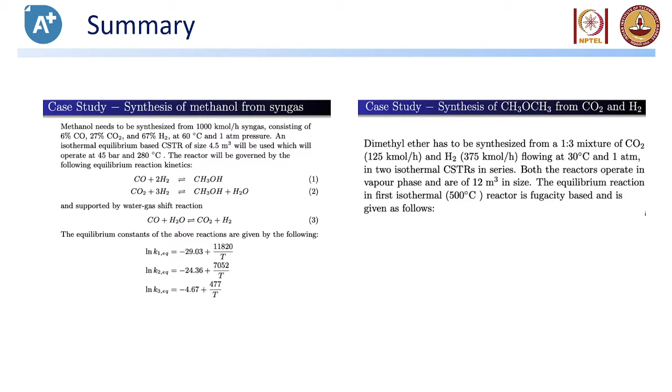So post that, I have only a couple of questions. Okay, so can you just answer quickly which among these are the model palettes available in Aspen among the four given? So among these four, there are a couple of model palettes which are mainly for reaction systems. Okay, can you just answer?

Okay, let me show you Aspen. So if you go to Aspen, you can just see the reactors under model palettes. If you go to reactors, you'll be able to see 7 kinds of reactors, right? So 2 are based on stoichiometry, 2 are based on equilibrium-based calculations, and 3 based on kinetic calculations. So among the options given, you have this one based on stoichiometry, another based on equilibrium. So these two, the reactor based on stoichiometry and the one based on equilibrium, are the right answer for this. Okay, that was just a simple question.

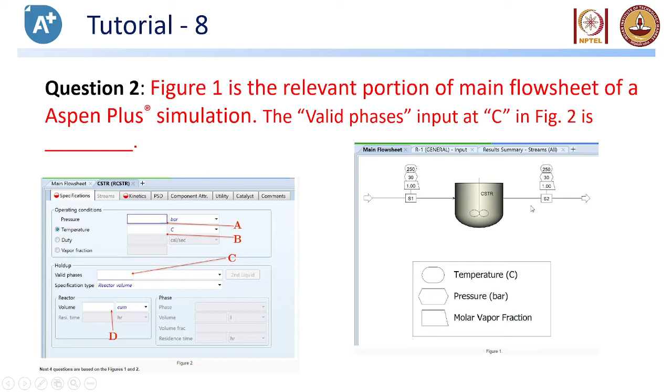So do we need any additional information for answering this question? Does anyone think that we need additional information to answer this question? No. Okay. Anyone else? It's not required, right? You can see that the inlet vapor fraction is 1 and the outlet vapor fraction is also 1. So which means that the entire reaction is happening in gaseous phase, right? So for the valid phases, if we select vapor, that is sufficient. Okay.

Okay, fine. So we were solving this question, right? We said we'll be simulating a separation plant, a part of it, and we just started with this heat exchanger setup in the last class. So people who have Aspen with you now, just do things parallel to me. I'll be showing you step after step. It will be ideal if you have done it previously, as we discussed last week, and come back with the problems you are facing, but we'll do it parallelly.

Okay, so we said that we're gonna simulate the liquefaction cycle of the process in the air separation plant, right? We said we're gonna simulate only the cold box which is enclosed in this red frame. So after finishing this exercise, we'll be understanding the calculator block as well as the optimization tool available in Aspen. Okay, fine.

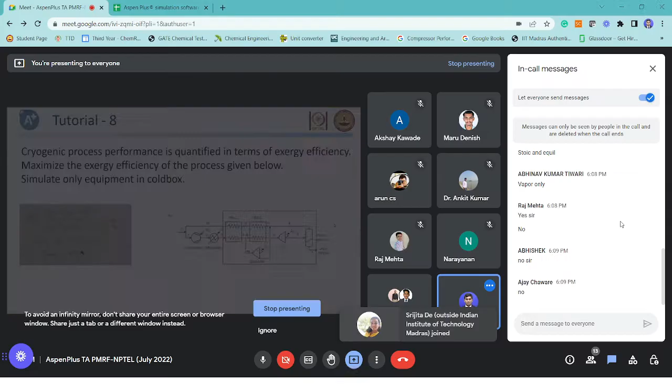So shall I continue with that question, or do you have any questions before we go ahead? I'll just repeat. Shall we continue where we left last week, or do you have any questions before we proceed? Which error you are talking of, Akshay? Assignment 8 part B. Okay, I'll check it. I didn't see your assignment. Towards the end of the session, I'll check it. Okay.

Which error did you get in CSTR, Akshay? Which question you're talking about? Because we didn't do any CSTR exercise in these sessions, so I don't know which question you're talking about. Okay, dependent error in CSTR. Okay, I'll have to check it, because I don't remember what he taught in lecture 24, synthesis of methanol. I'll check it and come back next week, because I didn't see this lecture. If it is coming for everyone, then probably something should be noted. Any other questions? Assignment 8 and the CSTR issue, right? Only. Okay, fine. So we'll continue where we left.

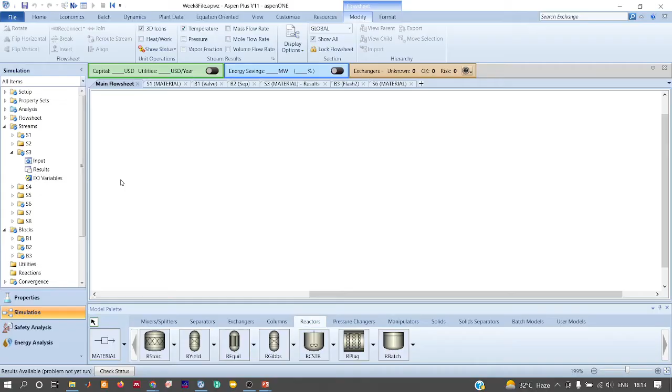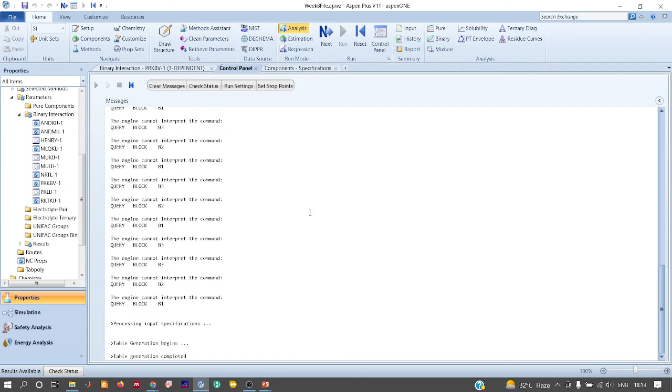We said we're gonna simulate, we're gonna put up this setup. So let me take a fresh Aspen. So the first step in Aspen, what do we do? We give the components, right? We'll start with nitrogen, air. Let me add oxygen as well. Okay. So for simplicity, let us assume air is a mixture of just nitrogen and oxygen. Okay. Then we'll go to the simulation.

So people, whoever have access to Aspen... last date for submission is tomorrow. Okay, I'll inform the concerned person regarding this. If everyone is getting an error, then something can be done with your assignment submission, so don't worry about it. So in your assignment you have a CSTR thing where you're facing an error? Is that the concern you have? If so, your assignment problem has a CSTR related question. Is that what you mean, or in lecture 24 there is some error, right? That's what I understood from your previous point. See, you can unmute and then just talk. Probably this chat is taking me to a wrong conclusion.

Oh, okay, fine, this makes sense. So you have two issues. One, there's an error in the lecture video, and the second issue is the assignment, there is something missing. However, the submission date is tomorrow. I got your point. If there is some data really missing, it will be updated, and the assignment submission date can also be changed accordingly. I'll take this point to the concerned person. I'll take care of it. No, I didn't see the question, so I can't tell at this point if data is actually missing or not. I'll have to check it. Right. So as of now, shall we continue with what we are doing? With respect to the assignment, don't worry about it, it will be taken care of.

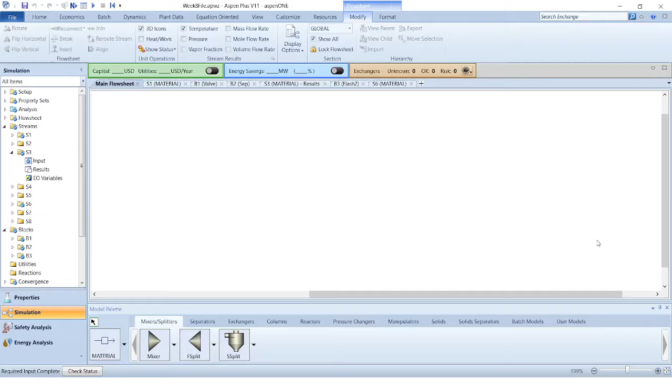So first let us place all these unit operations that we have over here. Okay, so we said one heat exchanger, second heat exchanger, then we said we have one splitter, right? Then expander. People whoever have Aspen with you, please do it parallelly with me, okay? So that if you are getting stuck somewhere, you will know.

In last semester classes, what I did was I was waiting till the students respond and they finish the assignment and then give me a response. However, during that time, all of them were having Aspen during this live session, so it was possible to do so. But now it seems most of you don't have Aspen.

While doing the same simulation, professor. Okay, fine. I will do this simulation first, immediately after this class. Okay, then I'll respond accordingly. Okay, just after the class I will do this, and I'll have to see what is there in lecture 24. I can't remember each and every lecture, right? So immediately after this class, I'll go back and see what is there.

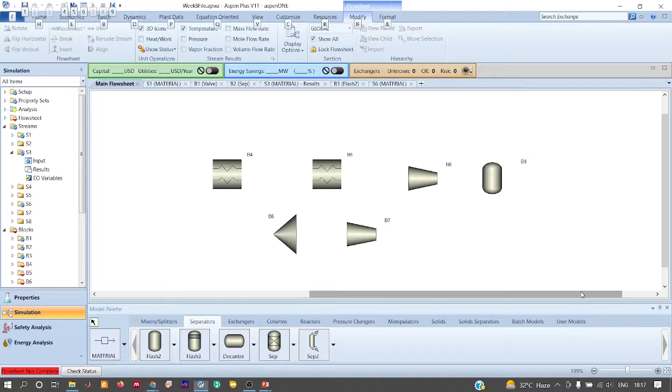Okay, fine. So we'll continue here. So we said we are placing this one, right? So we have the first stream, which is hot inlet, right? Hot inlet is taken to the splitter. From the splitter, a part is taken to the second heat exchanger, right? Then the hot outlet is taken to this turbine. I think I missed something. There is something called a mixer over here, right, which I missed. So let me add mixer as well.

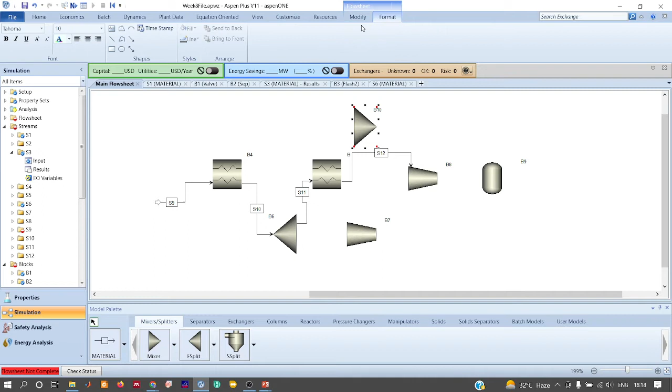Right. So from the turbine outlet, I have one tube. This is my liquid product. This is going to this part. I have cold inlet here. I have cold outlet. See, if I do everything, then it's hard to learn for you. Unless you do it with your hand, it's really difficult to understand. So, try doing it parallelly.

So, I remember few of you said you have Aspen with you, right? Can you start doing it and tell me your status? I'll just put this flow sheet first, then I'll wait for some time for your response, okay? Okay, let me just give the same numberings. Here's my 3, 4, splitter, 4 expander, 9 over here.

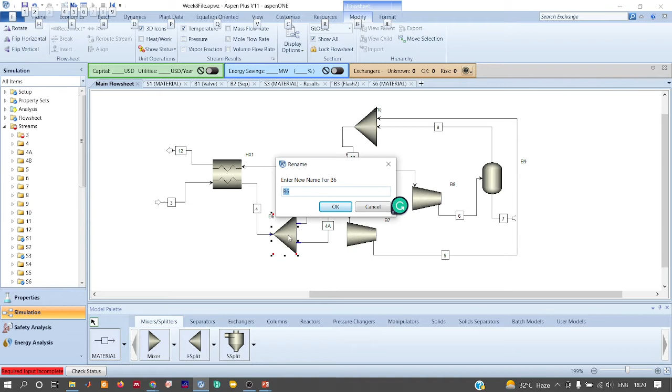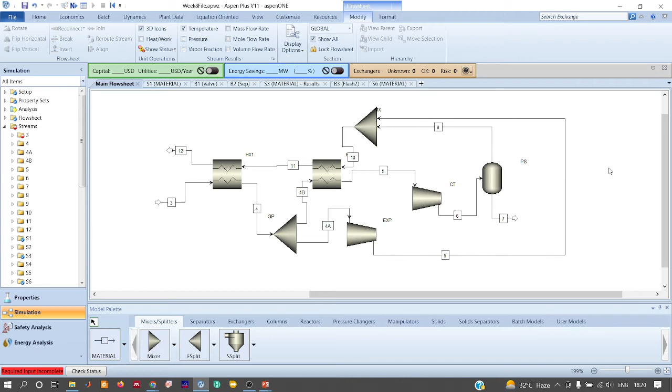So yeah, this is how the flow sheet looks once after setting it up. So people whoever have Aspen, can you also do the same exercise and give me a confirmation that you are able to set up this flow sheet? So all I need to do is have 2 heat exchangers, 1 splitter, 2 expanders and a phase separator, right? So let me show you the flow sheet. So this is what we have set up.

Could you follow what I did? Everyone? Any response? Yes, okay, thanks, Mr. Arun. Others? Can you reproduce the same? Will you be able to do this flow sheeting? Okay, thanks, Raj. Others? Others, can you reproduce this? Will you be able to do that? If not now, sometime later. Okay, thanks, Akshay.

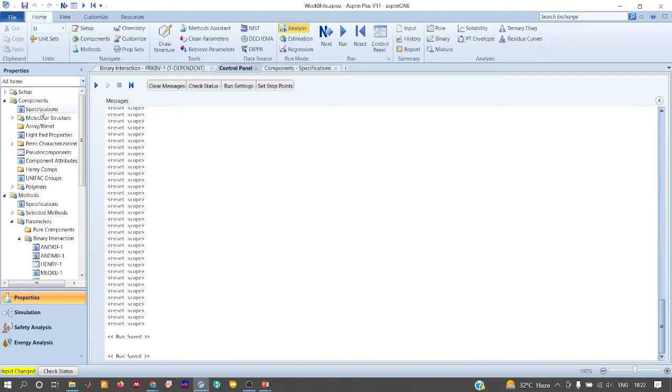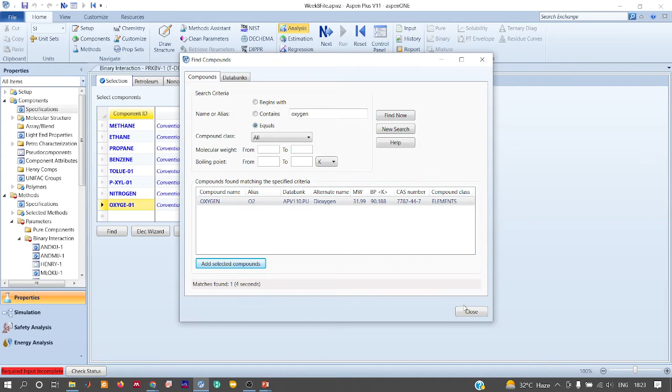Can you show component? Which component, sir? The component means the initial thing. Adding components, is that what you mean? See, what we need to do is, while searching, for example, I'll just delete this, okay? So what we need to do is click on find, okay? We'll search over here. So after searching, it gives us what it matches to. Just click on it, that's all. See, the oxygen gets added to this components list, okay? So that's how we add it.

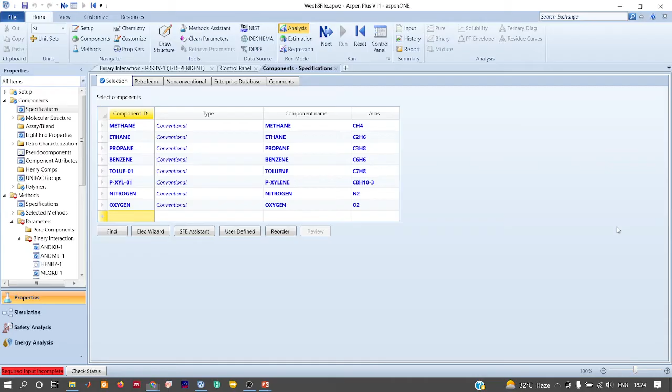Or else there's another way of doing it. Let me show you. Let me delete this. You can just type it over here itself. That's a simpler way of doing it, okay? Could you follow it? Is that what you asked? You asked me to show the components, right? Okay, fine. So just click on next. What it does is, every mixture or components which we give, it handles using binary interaction parameters, right? So we need to give a confirmation of binary interaction parameters. So this will take us automatically to this page. That's what it means.

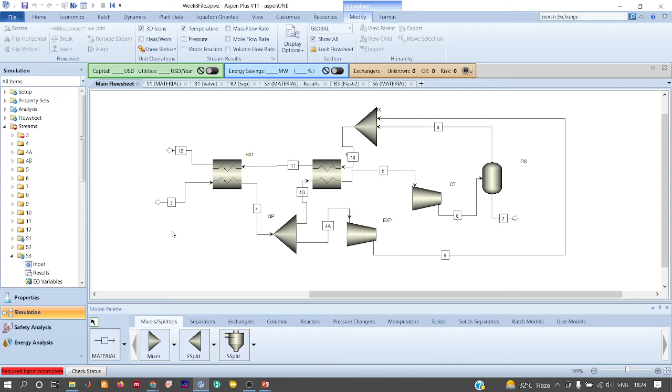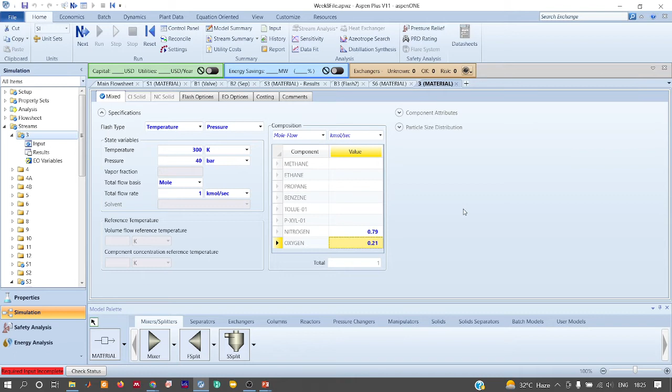So then we went to simulation module, and then we set up this flow sheet, okay? The next task for us is to give the stream data, stream information. For example, stream 3. This is at ambient, let's assume 300 Kelvin and 40 bar, 1 kilomole per second. Now we are talking of liquefaction of air and separation of air into its components. So initially, to simplify the analysis, we'll assume air to be a binary mixture of nitrogen and oxygen, 79% and 21%, just for simplicity's sake.

So after giving the stream input information, you can see that the stream data is complete. So that's why it turned from red color to blue color, okay? Now let's go to block.

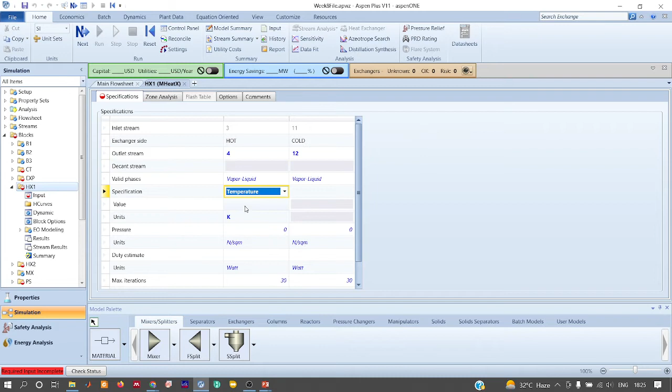HX1. So since the aim is to optimize the operating conditions, initially we'll start with just close enough numbers, okay? Let me just cool it down to 250 Kelvin. I'm just guessing it, I don't know the actual value. This is one of our variables in optimization, okay? The temperature to which it has to be cooled before expanding in the turbine. So that's one of our optimization variables.

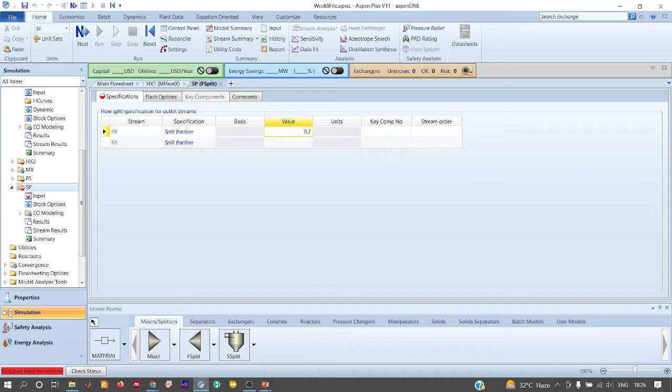Even our split fraction is also an optimization variable. As you see in these slides, we have three variables, T4, T5 and the split fraction. So initially I'll get started with some value. Let me send 0.2 to the heat exchanger, and then in the second heat exchanger I'll give hot outlet, cold outlet. Hot outlet, let me give 100 Kelvin. I'll also give the zonal profile. Okay.

Then I have an expander. This is a turbine, right? So convergence, I'll say this is two-phase, because there's a chance that we have two-phase at the outlet, and discharge pressure, we are expanding it to 1 bar. And let's assume the efficiency to be 85%.

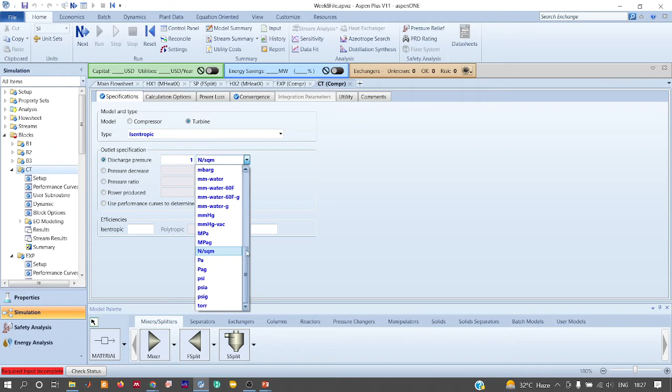Then we have another turbine towards the end. Change the convergence to two-phase instead of single phase. Discharge pressure of 1 bar. It's bar, right? Just be careful. This is about 70%. Then we have the separator. Its heat duty is 0 and pressure drop is 0. Now after giving all this data, it says the required input is complete. Do you see this? Could everyone follow till here?

Giving the input, the flow sheet may not converge at this point of time, because we are yet to optimize the process, right? Optimize the operating conditions and all. The flow sheet may not converge. We'll vary them in the optimization. Okay.

Thanks, Arun. Others, could you follow till here what I did? Okay, thanks, Raj. Others?

Okay, fine. So the next step in this process is to create a calculator block. So how do we create a calculator block? The calculator block is essentially done to calculate this efficiency that we are talking about. So go to flowsheeting options, calculator. Here you will be able to see the calculator block, right? Just click on it.

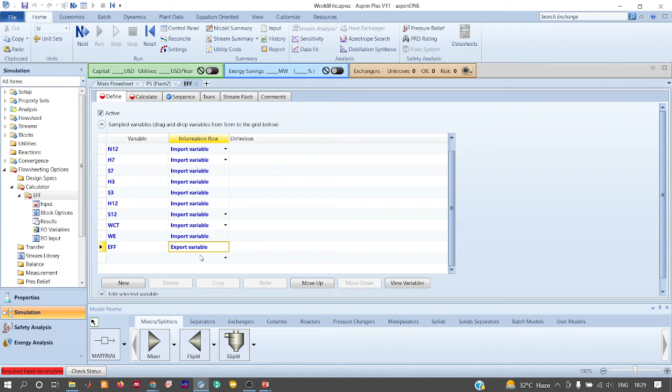So you can see the list of definitions we are about to make. N12 is an import variable, right? All the variables which the calculator needs to import from some other subroutine are called import variables. This calculator block takes all these variables from other subroutines and exports the efficiency that we defined here. Thus, the efficiency becomes the export variable. Let us define each one. Since this is exergy efficiency, this will be output and parameter 1.

This is a block variable, right? Work of the expander. Which one? EXP, and the variable is the net work, right? And similarly, the cryo turbine. It's also a block variable. It's CT block, net, right? Then we have stream 12. This is a stream variable. Select the stream variable, and then it's 12. This is entropy, right?

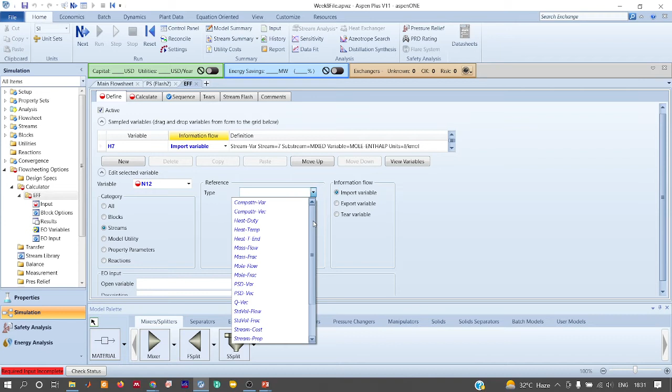Then we have H12, the stream variable, enthalpy. There is a stream variable. Which stream are we talking about? Third stream. This is entropy. H7 is enthalpy of the seventh stream, right? Select the stream and then enthalpy. So this is flow rate. Similarly, N7.

So you can see that the definitions are complete. Now what do we calculate? We calculate the efficiency. Before calculating the efficiency, we need to define ambient temperature as 300. Then we have the definition of exergy, EX7, written here: EXi equals Hi minus Tamb into Si. So H7 minus Tamb into S7. Then EX3 is H3 minus Tamb into S3. Then EX12, which is H12 minus Tamb into S12.

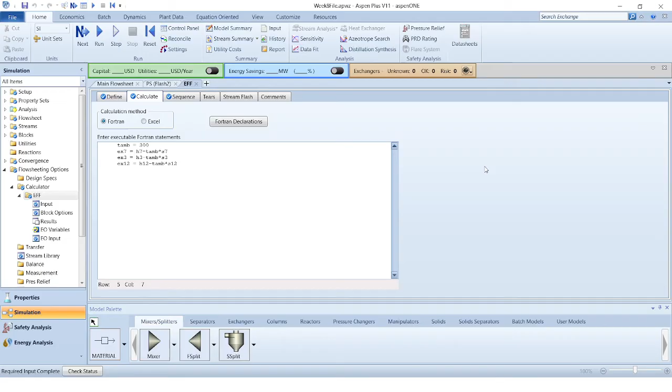So on the numerator side, we have N7 into EX7 minus EX3. On the denominator side, we have N12 into EX3 minus EX12. Just to be careful with the sign convention, I will say ABS. Okay.

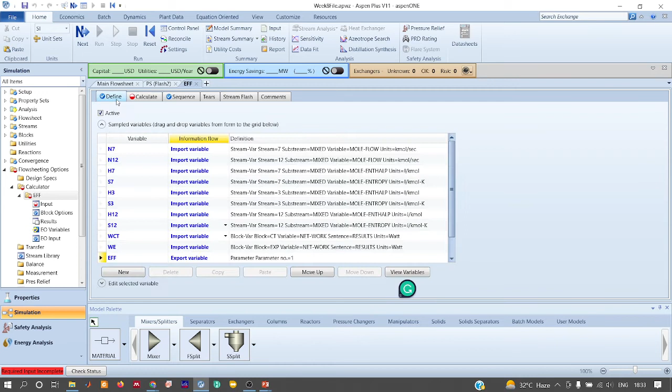What did I define for expander? WE, right? What is my EFF? So that's all. So is the calculator block okay? The property method is Peng-Robinson equation of state. Okay, it's Peng-Robinson equation of state.

So the calculator block, whatever I have shown you, is this clear? How did I give the import variables and export variables, and how to give the relation between these two? We are using Peng-Robinson equation of state. Okay. Is the calculator block clear? Any response? See, okay, fine, no issues.

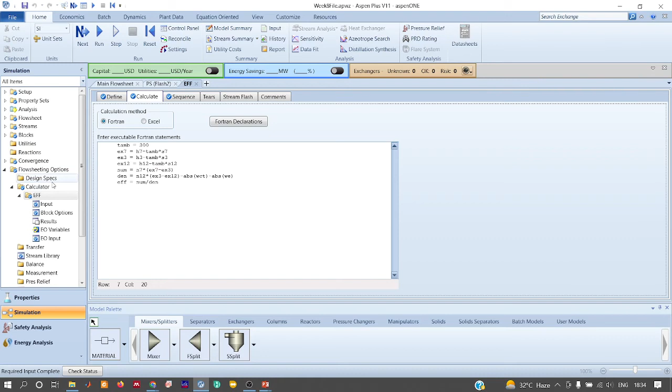See, all we need to do is I'll just do it. So, first of all, after coming to calculator block, you need to define the import variables. Basically, what do you want to calculate from the system? If I want to calculate the work which is obtained from both of this expander, which is net work, I'll show you how do we do that. So I'll say this is W1, which is one work, second expander work, and this is W net, which is sum of these two. So W1 being an import variable, because we are importing it from the flow sheet, right?

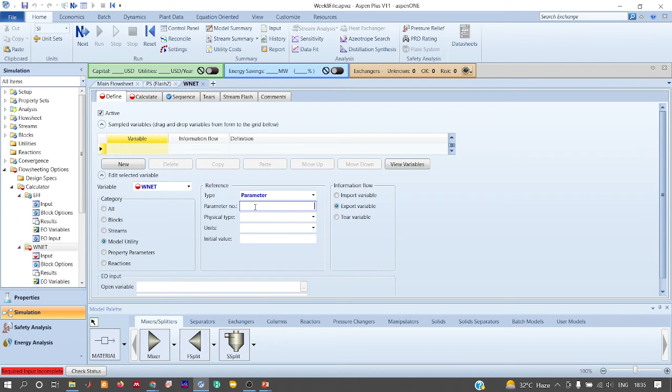We will say W1, which is a block variable, block, and then it's the turbine's net work. So if you type net work, you'll be able to see the net work. And similarly W2, it's also a block variable, it's an import of the expander. Among all this, just look for net work. And similarly, this is an output, right? This is an export parameter. Since we already gave 1 for efficiency, we'll take 2 for this.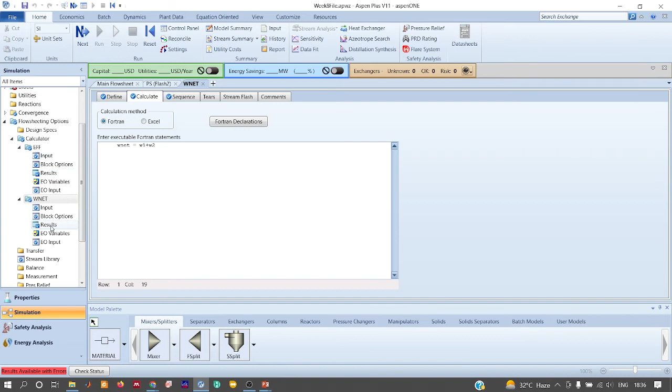In the calculator, just type net work equal to W1 plus W2. Let us see how does it run. The simulation may not converge and give us errors because of the conditions which we get. However, you can see that the calculator block is converged, right? So if you see the net work, you can see that you have some value. However, the flow sheet is not converged because of the values which we give. That can be taken care in future. So as of now we are only seeing the calculator block.

So is the calculator block clear now? Could you follow what we did? Everyone? Yes. Okay. Thanks, Arun. Others? Okay. Great.

Is this block inside design spec? No. When you see here under flow sheeting options, you have multiple subtabs. So this is just below design spec, not under. So this is under flow sheeting options, but below design spec. Any other questions? Okay, fine. Let me continue.

So even the efficiency, which you can see it says 0.44, when you take it in terms of percentage, it's about 44%, right? However, this flow sheet didn't converge because of the values which we gave. So we'll run an optimizer to optimize the efficiency, making sure that the flow sheet converges. So further, we need to give certain constraints. What constraints we have? Approach temperatures in both the heat exchangers must be greater than some certain value, and it's a single phase expander.

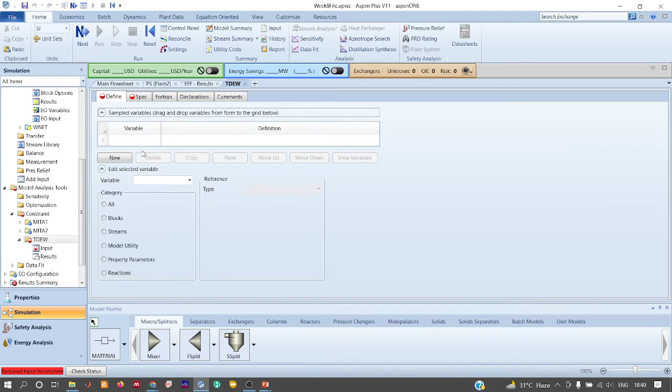So how can we give such constraint? The simple way is checking the dew point of stream 9 and the stream temperature. If I say that the temperature of stream 9 is slightly above its dew point, then it is assured that I am in vapor phase, right? Did you get this point? So giving this constraint is an indirect way of setting that this expander is in single phase. So that will be my third constraint. So I'll say T9 and T9 dew. Go to stream 9.

Temperature. Similarly, the dew point temperature we need to calculate, right? So it will be a stream property. Okay, stream 9, we want to calculate the dew point.

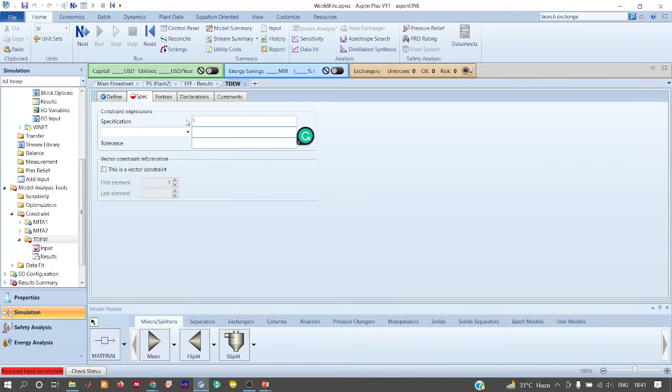Okay, so we said stream 9 value should be greater than its dew point. So it's stream 9 dew. It should be greater than, let's say, 2 Kelvin, tolerance of 1. So this ensures that my stream 9 is always in vapor phase because my stream temperature is greater than its dew point, right? So this is an indirect way of giving the constraint.

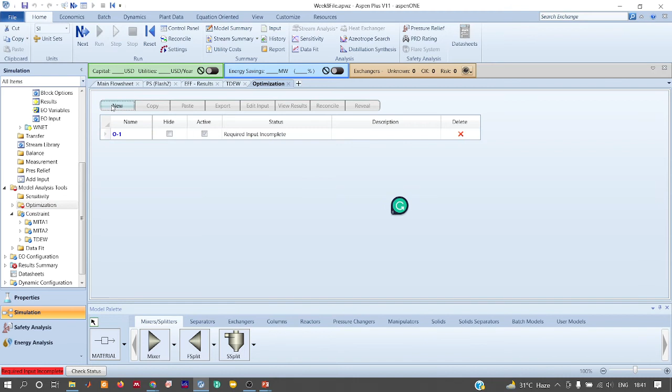Now once the constraints are set up, all we need to do is call the optimizer. So click on optimizer, new. We need to define the efficiency term which we have previously defined in calculator. So we gave the number 1, right? So make sure that you also give the number 1 over here. Once we give number 1, we need to maximize EFF. These are my constraints which need to be satisfied.

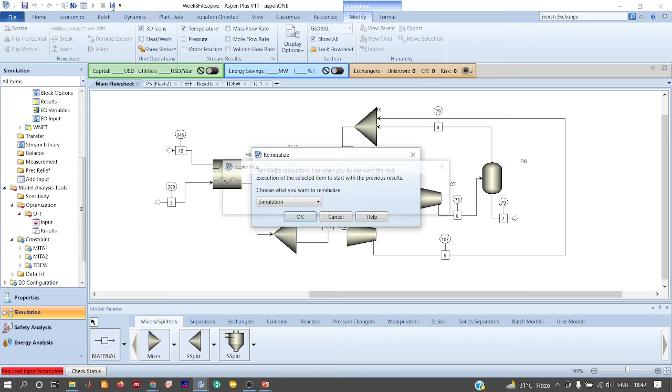Then you can see a vary tab over here. So once you go to vary, what are the variables we have? We have 3 variables, right? T4, T5 and the stream fraction. So in this figure, if you see, T4 is the hot outlet of the first heat exchanger. Similarly, T5 is the hot outlet of the second heat exchanger, right? So both of these can be defined as block variables instead of stream variables. So all we have is 3 variables in this setup.

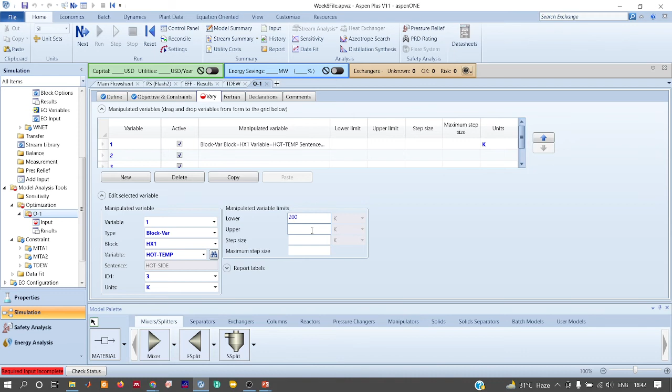So my first variable is block variable for Hx1, its hot outlet. You can see the specified hot temperature 83. My lower limit is 200 Kelvin, let's take an example, and upper limit is 280 Kelvin. And similarly, the second is another block variable, another hot outlet. This is the second outlet, and then I have temperature. So this one can have a lower limit of 90 Kelvin to about 140 Kelvin, let's say.

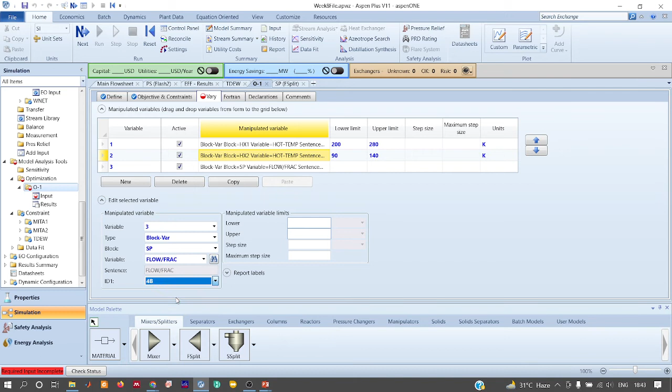And the third one is the block variable of this split, right? So here is the split. Let me just confirm what is the input which I gave with the split. So I said 4B. So you need to give the same value over here of the ID 4B. So 4B, let me choose from 0.1 to 0.9. Okay. So till now everyone could follow what I did?

Could you follow? Yes. Okay. Thanks, Arun. Others? Akshay, Ankit, Maru. No. Okay. Which point didn't you catch, Akshay? Okay. Just do it, and in case you're getting stuck, just get me.

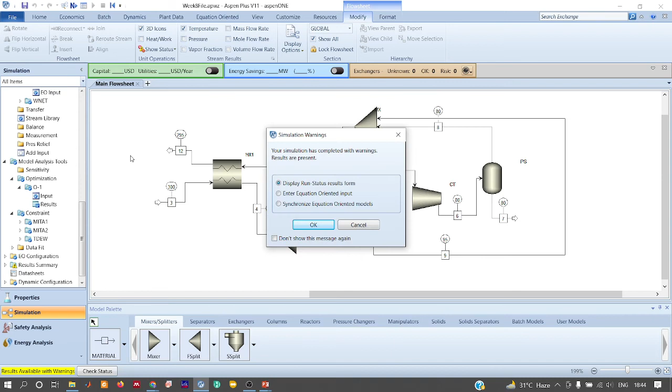So that's all we need to do with the optimization. Just try running this. Let's see what happens. See, now we have some results, and it says results are available, right? Once the optimizer is run, you can see that all constraints are satisfied, they are inactive. And in the manipulated variables, you can see that although initially we gave some value, the final value is something different, right?

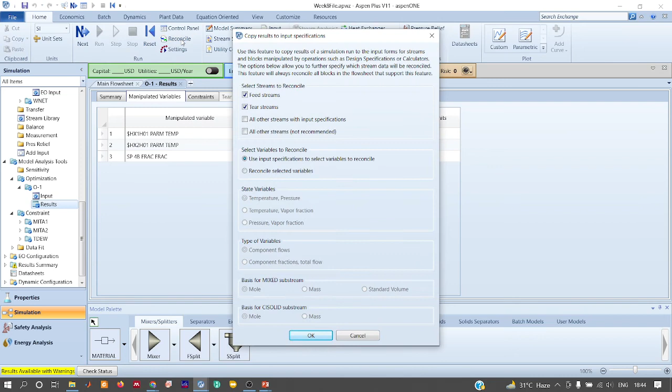So if we want to get the output results of the optimizer into our input stream, all you need to do is just reconcile your results. You can see on the top something called reconciliation. Just reconcile, click OK, and OK, that's all. This will take all the output that we obtained from the optimizer to our input variables. Now you can deactivate the optimization block and just run the flow sheet.

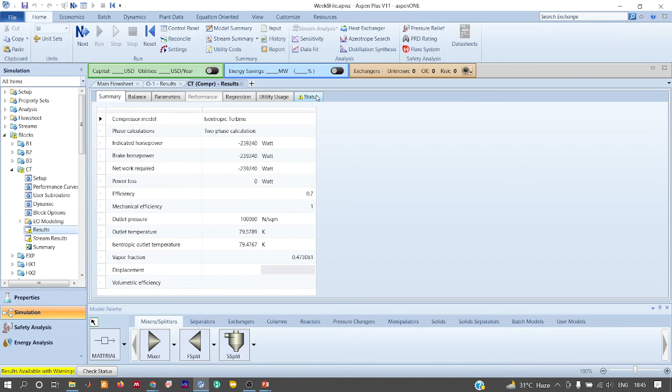See, now you can see that the simulation has converged. You get a warning because there's a two-phase expander over here. Let me show you. You can see that this cryo turbine has the warning. What it says is it has got two-phase entry. So that's what it means. Okay.

So could you follow the calculator block and the optimization? Once you do it, you will come to know where you are facing the difficulty. Unless you do, it's just too difficult to follow this class. Any question you would like to ask on the optimization and the calculator block?

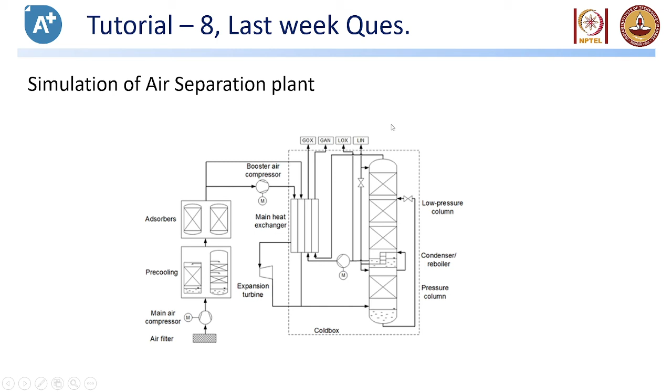Okay, if not any questions, let me just summarize what I did. So the basic idea is to simulate the entire plant. As of now we have simulated this part of the process, so in the coming class we'll simulate this part. What we did is the heat exchanger setup, which is the liquefaction cycle, called the Kapitsa cycle.

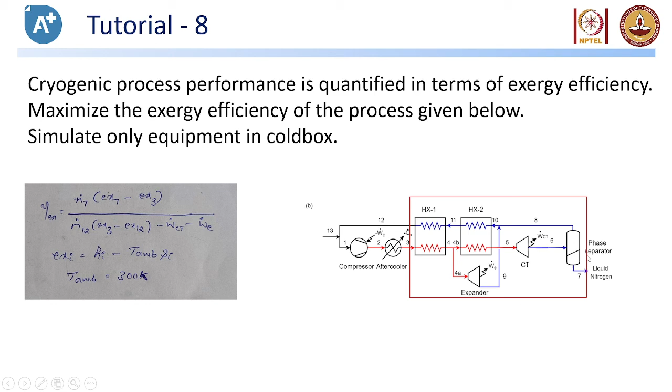So we said that this particular liquefaction process has got about 6 unit operations. We have a mixer here as well. So we initially set up the flow sheet with 6 unit operations, then we connected the streams and randomly gave the input information, because we don't know the operating conditions that maximize the efficiency, which we defined in terms of the exergy losses in the system.

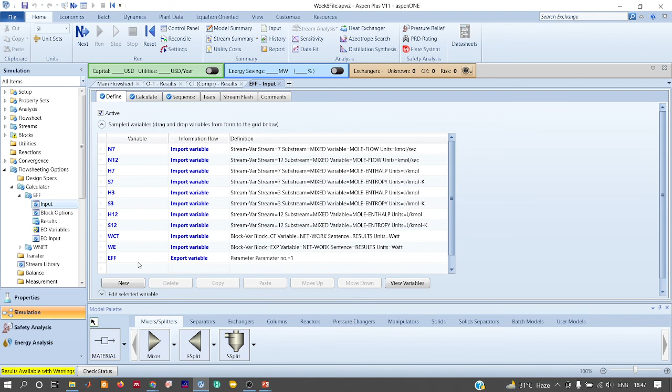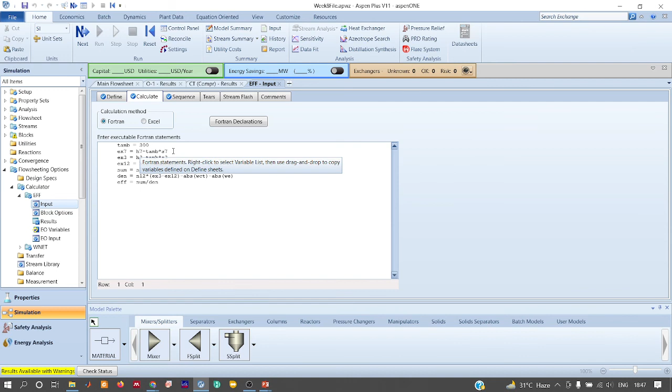Then after giving the input data required to simulate the process, we found that the simulation was failing to converge. Then we went to the calculator block. We defined our input variables and the efficiency as the output variable. In the calculator under the Fortran tab, we gave the data and the calculation formulations we have in our system. Then we went to the optimization tool and clicked on constraints.

So we added three constraints to this problem. We said the internal temperature pinch in heat exchangers 1 and 2 should be greater than a certain value. Obviously we can't have crossover between hot and cold streams. So what is this internal temperature pinch? It is the minimum temperature difference between hot and cold streams. If we have crossover, it violates the second law of thermodynamics. So we said the minimum internal temperature approach should be greater than a certain value, in this case 5 Kelvin.

And the third constraint is that the expander we are using is a single phase expander. So how did we make it single phase? We said the temperature of stream 9 should be greater than its dew point temperature. This makes sure that the stream is in vapor phase. So those are the three constraints.

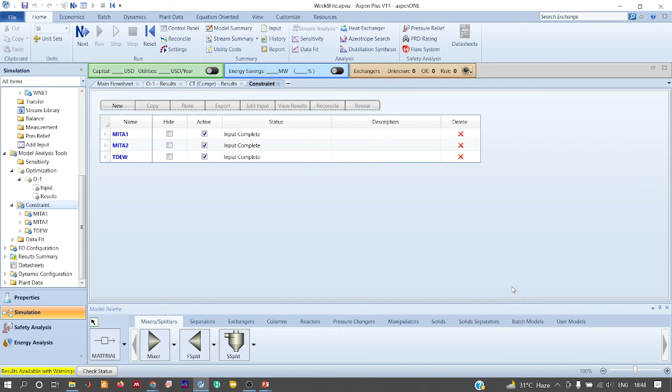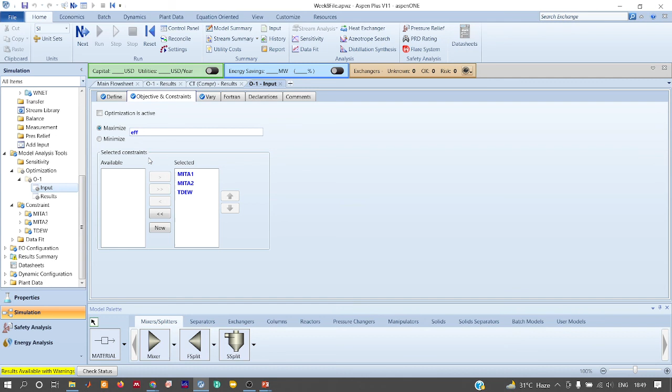Once after defining the constraints, we went to the optimization block. We defined the objective function, which we initially wrote in the calculator block, and gave the same parameter number so that there is a pointer linking these two. We are trying to maximize the exergy efficiency, and these are the three active constraints we selected. Then what are the variables in our system? We have three variables: T4, T5 and the split fraction.

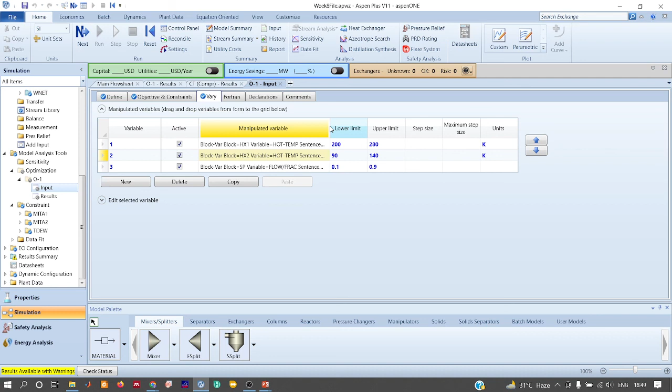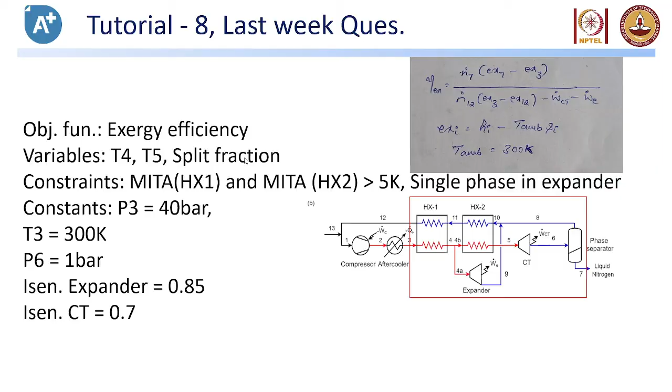Instead of directly defining T4 as a stream variable, we can define it as a block variable outlet temperature. So T4 becomes the hot outlet of heat exchanger 1, and similarly T5 becomes the hot outlet of heat exchanger 2. Let me just extend this. My first variable is hot outlet, stream 3, my second variable is the hot outlet of heat exchanger 2, and the third is the split fraction in the splitter: to what fraction should we send it to the expander or to the heat exchanger.

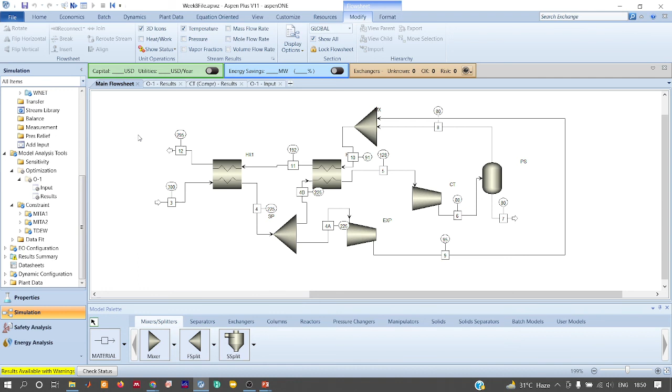So once keeping everything ready, once we run the optimizer, we have a converged value, and the efficiency calculated at the converged value is about 48%. So that's how we have simulated this process and optimized it.

So I hope you got it. Unless you try it out, you can't say that you understood it, so just try it out. In case you're getting stuck somewhere, you can come back next week and we'll continue. We'll start with the distillation setup next week, but if you are stuck with this question, we'll come back to this as well. And I'll check the assignment problems you have pointed out, and if it is a genuine case, I'll report the same to the concerned person.